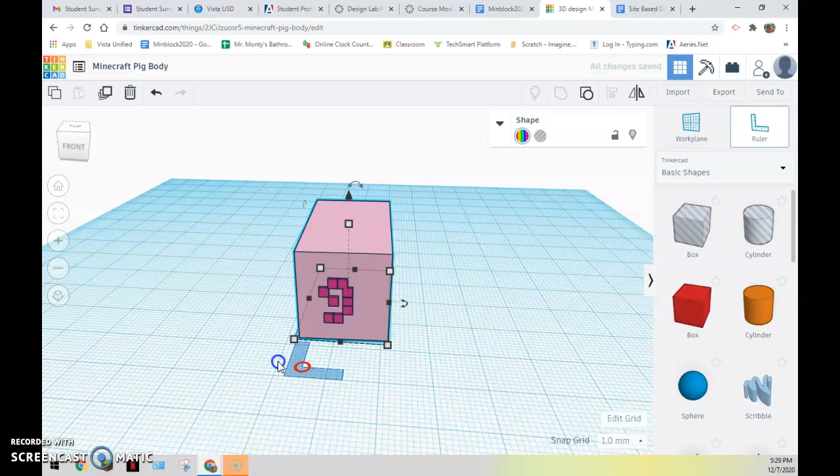So the first thing you want to make sure is, if you notice you don't have a ruler, bring out the ruler so that you have it.

So this is what we're going to be creating. We're going to be creating the tail and the body. Body's obviously super easy, so let's focus on the tail.

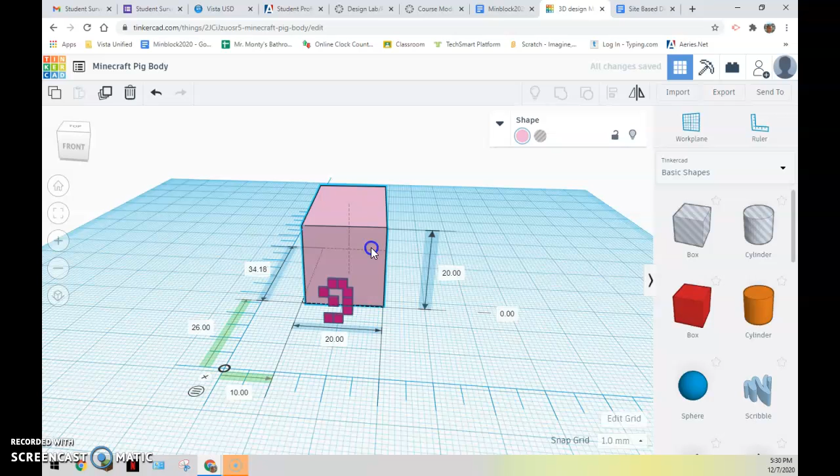Let me go ahead and look at this tail here. And let's look at this. So based on this, I'm going to go ahead and lay it down to make it easy for us to do this.

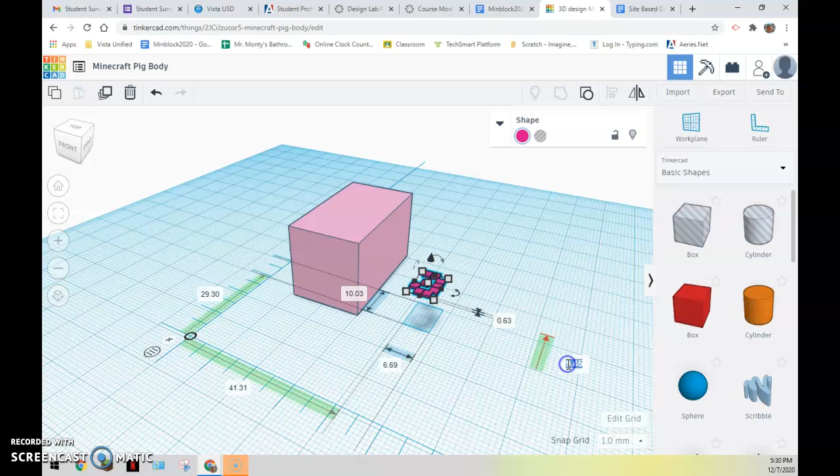Okay, so there we go. There's our tail, I'm going to just lay this down flat. Right now we have a tail that is 6.69, so if we want to make this nice and easy, we'll just make it 7 by 10.

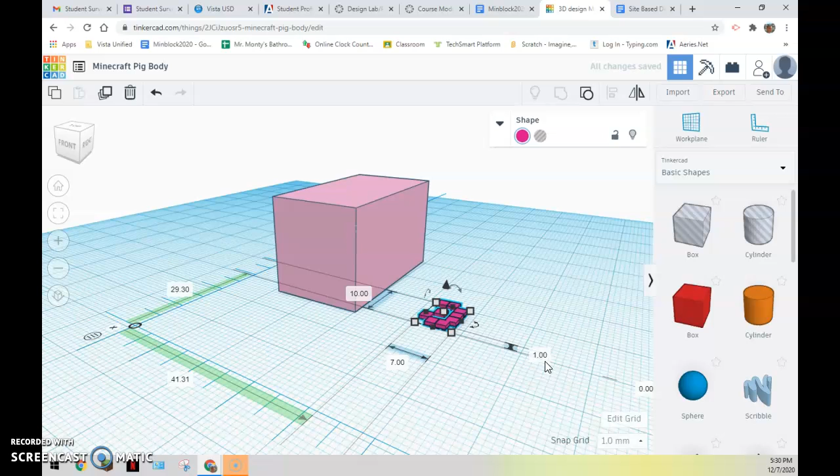Okay, we look at the height, it's 0.63, so let's just make it 1 to make it nice and easy to figure out. Now for snap to grid, I would recommend turning this off so it's easy when we're moving things.

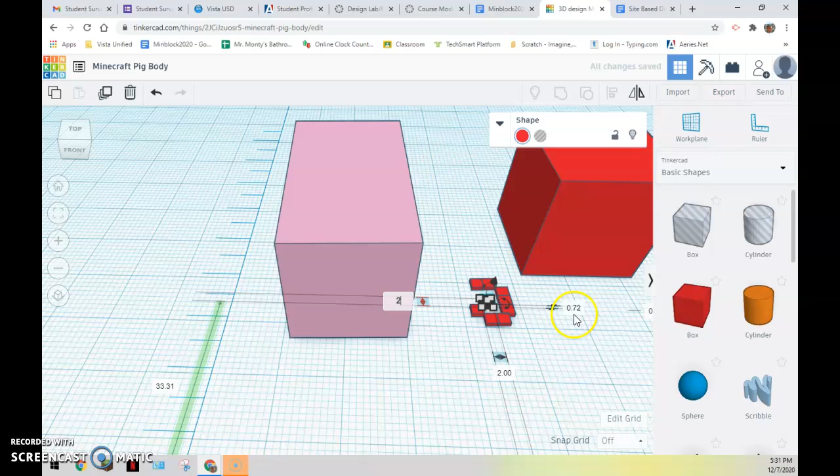So what we're going to be using is these big old blocks, but we just need to make one of them. Let me just undo this. You can see for each block, here this is a 2 by 2 pretty much, and then 1 height. There we go, so that's what we want to do.

So we want to do a 2 by 2, 2 by 2... oops, by 2, let me do that again. This one is 1. Okay, so there we go, we got our blocks here.

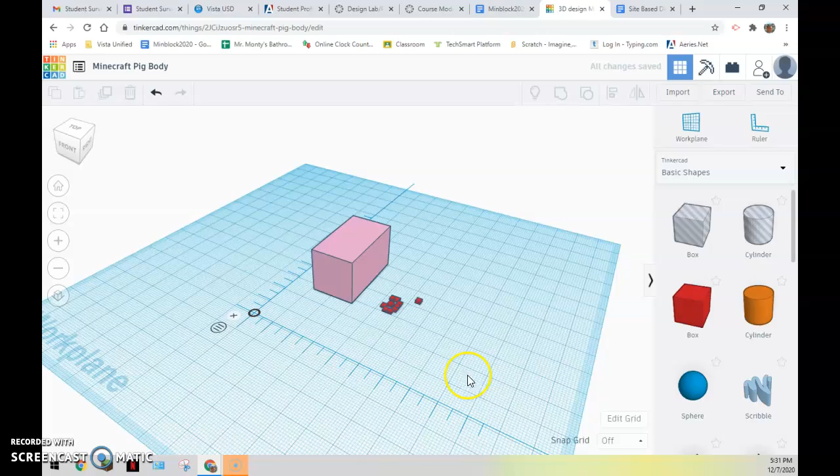Let me go ahead and zoom in so you can see. Let me move this over. Okay, so the easiest way is we click and duplicate, and we can put these together.

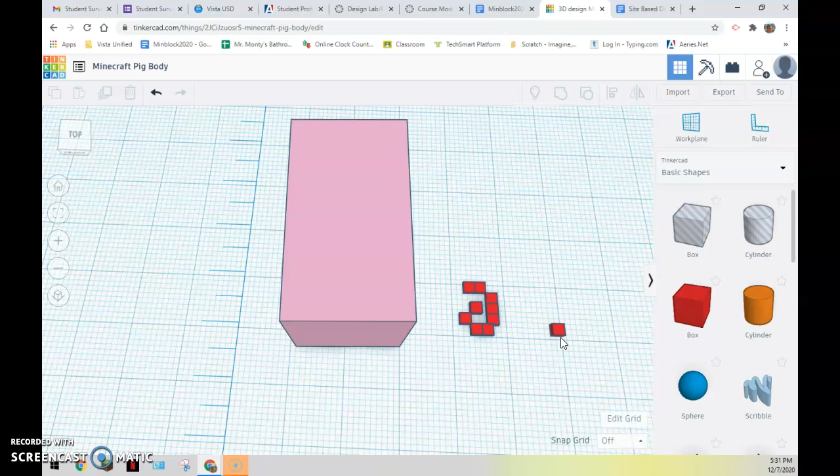So let's go ahead and make all these the 2s. So let me duplicate. I'm going to click over here, click duplicate, and then what we need to do is zoom in. This is the tough part, because when I have multiple objects, it goes to the center.

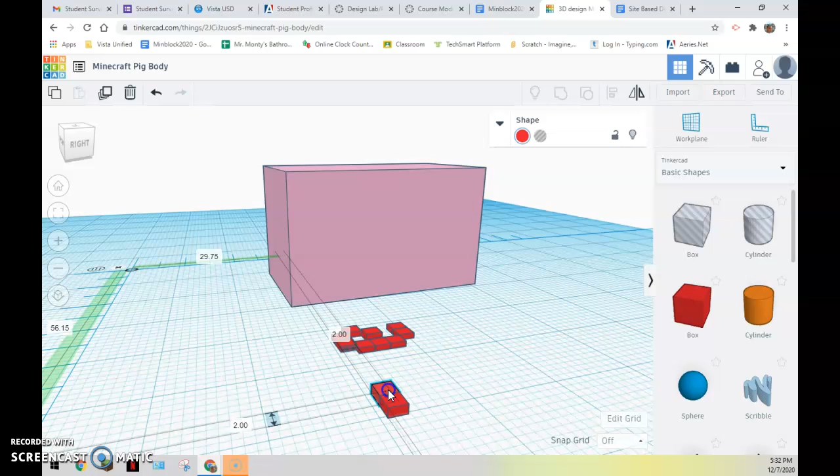Okay, and then we need to get them together. Oops, wrong side, let's do it over here. Don't worry if they're not perfectly touching, we're going to center them. So what I did is clicked on align to make them align, and then I'm going to click on group.

Okay, so now that I have them together, now I can make 2 of these. I'm going to duplicate this, and then move that up. Oops, that's not how you want to do that.

Move the other one up about the same height. Now remember, this is just an estimation. We'll probably want to get these 2 to line up, so I'm going to click and select by drawing the square, and align them so they're nice and aligned.

Okay, now the next thing we're going to do is duplicate another one, and move this over here. Not that way. Understand, to undo stuff, you can either click back to undo or press Control Z, which you can see it says Control Z.

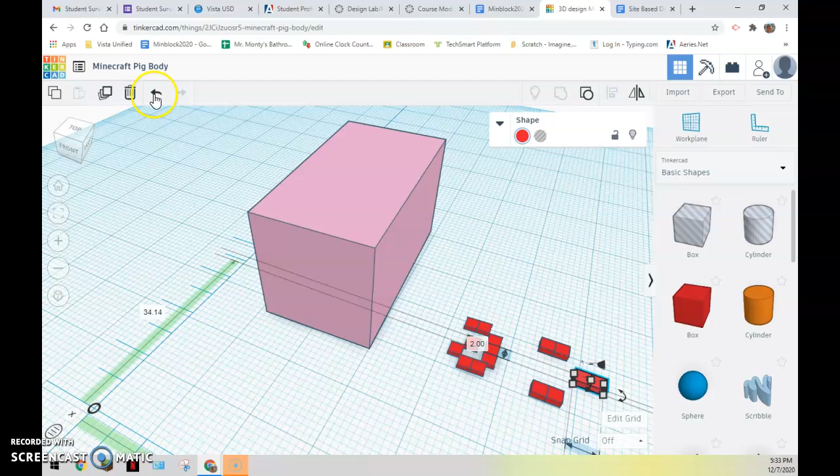Okay, now we're going to turn this 90 degrees. I'm going to type in that 90 degrees. If you click on the 0, it'll let you type in 90 degrees, and it flips it over. Okay, now we need one more.

Now there's a couple ways you can do it. You can either make an individual one, or you can just duplicate this and move it up where you have both of them overlap. And as you can see, there you go.

Now all I'm going to do is select these, make sure they're lined up perfectly, and then we're just going to group them. Okay, and right here, and group.

Okay, now the last one's going to require making just 2 of these. So I'm going to duplicate, make a copy. And then what I'm going to do is move this guy up here, and then we just need to move him right there.

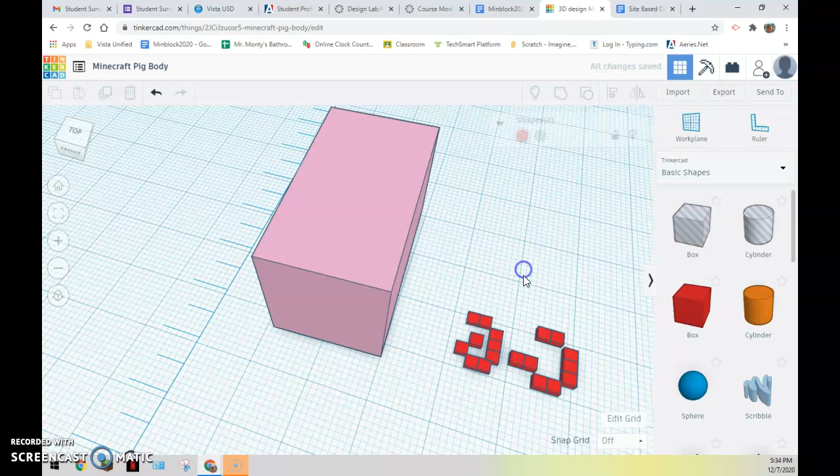And then what I'm going to do is ungroup this guy, and now I've got the other block free for me to move and place right about there. Okay, now it may not be perfect, so just make sure you look above, and that way you can clean it up.

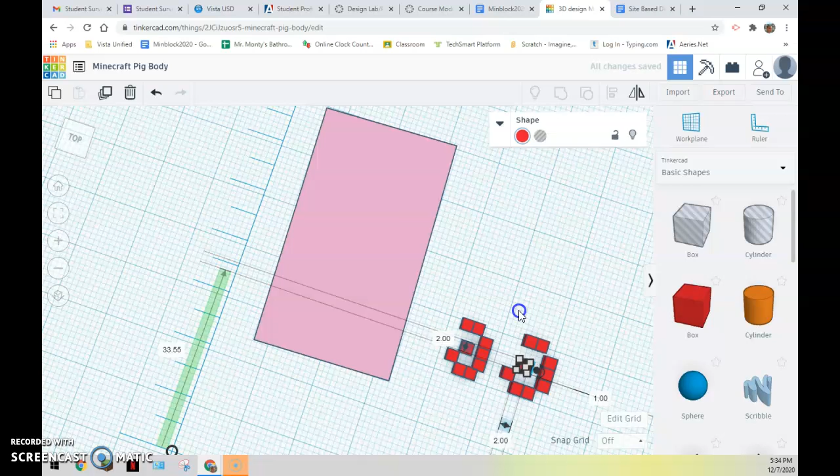And that looks pretty good. Now let's go ahead and group us, so draw a square and select all of them, group it together, and let's go ahead and change it to that color, which we wanted like a dark red. So there you go.

Okay, so that part is done. Now the other part is to make this. To do this we pretty much need a box 20 by 20 by 34, and let's make that 35, make it nice and even. So 20 by 20 by 35.

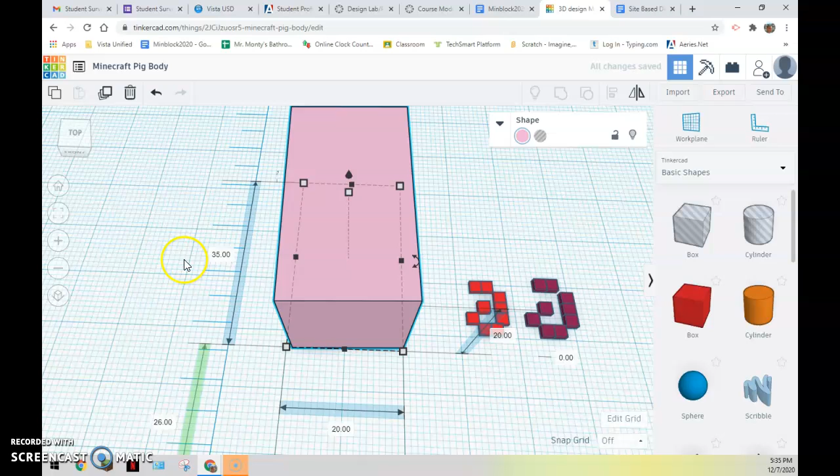So I'm just going to do another box over here. There we go, and we're just going to move it out of the way here. So the only one we need to worry about is this length one right here, 35, and there you go, that's the length.

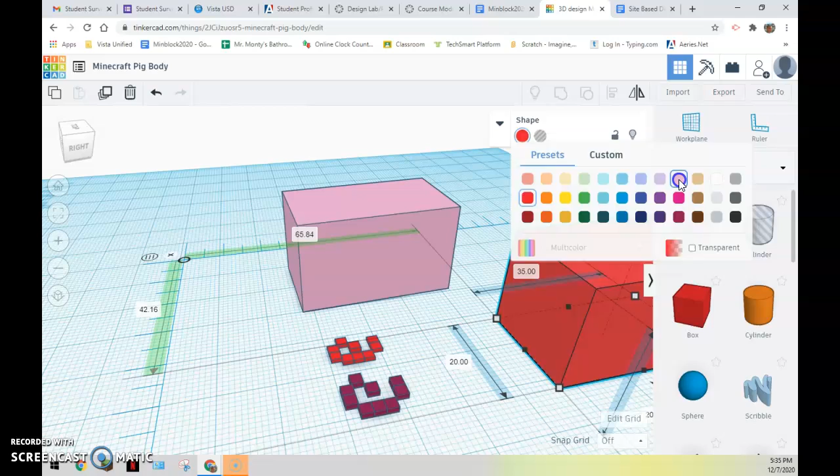Okay, now let's change it to pink, a nice light pink, so there we go. And then what we're going to do, I'm going to go ahead and move this guy, regroup him, and I'm just going to move him over.

Oops, see that's what happens, you be careful with that. Control Z undoes that. So this looks like it's all grouped together, so I can go ahead and move him. So I thought he wasn't.

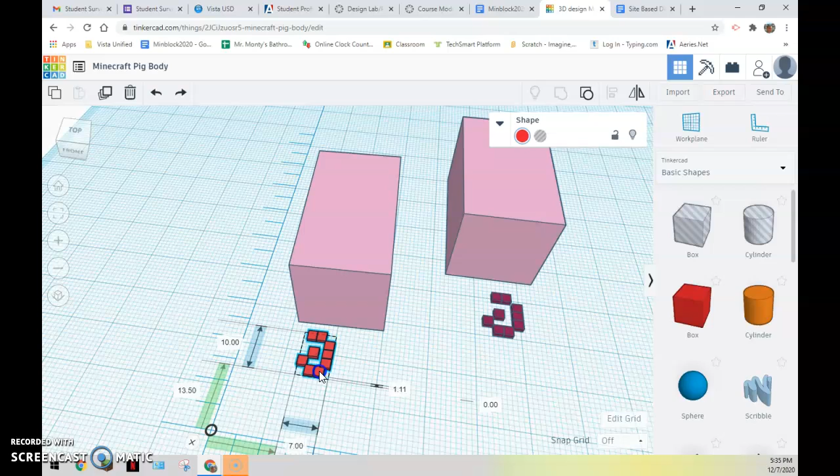And so all we need to do is now just move this guy up to there. So we're going to flip him up by using that rotate, so you're going to find that, make it 90 degrees, and then bring this guy over.

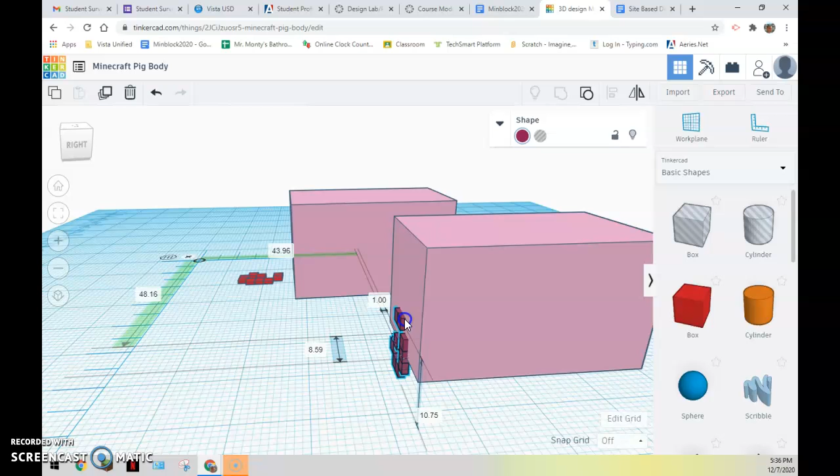There we go. Now to center them, I'm going to click and select both, so see it has both of them. I'm going to use that align, so center it there, and then center it there, and then group. And then, because it's all one color, if you do multicolor, there you go.

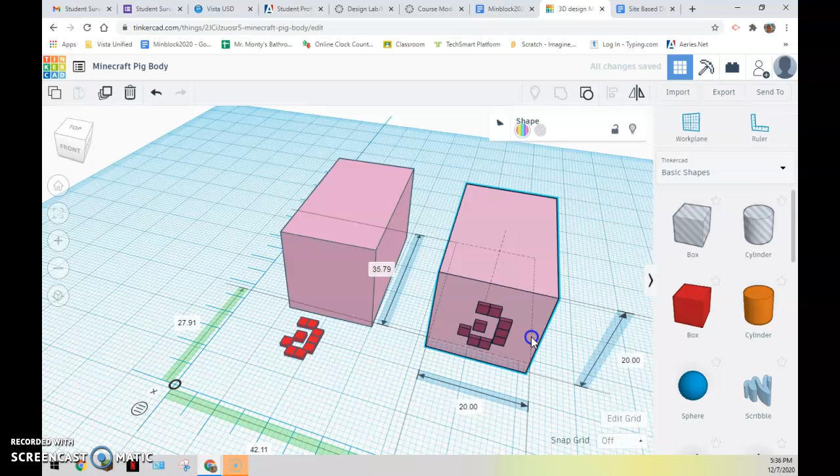So this is how you can do the pig's body and tail. Okay, so thanks for watching, and we're almost done with the pig.